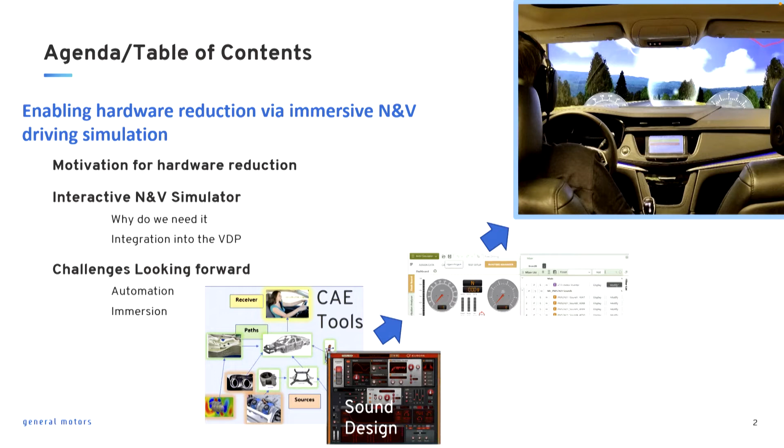So to start out on this motivation slide, it's a pretty simple slide, pretty simple schematic, that talks through what is probably a typical historical vehicle development process, I would say realistically at probably every OEM. And just to walk through the slide, the blue bar is all pre-production vehicle development, and the output of that feeds into this little green bar here, which would be the production development, so hard tooling, production assembly.

But if we focus on the pre-production vehicle development process, it typically has some form of pre-production vehicle development or component development, right? A lot of times those components are built using soft tooling. A lot of times they're built using some labor-intensive component assembly. Those eventually go into a limited run assembly process. Again, typically not a production environment, so it's kind of a station build type of offline environment. Sometimes it is really reworking in garages.

Those vehicles that are built using that process, obviously it takes a fair amount of time, but they go into physical testing. So a lot of times at a proving grounds, but the vehicles themselves are built from low fidelity parts, right? Again, they're soft tooling, so the tooling itself is not tuned. A lot of times things like acoustic packages aren't sealed entirely correctly. Mounts aren't fully developed, so the mounts themselves aren't isolating as they should be.

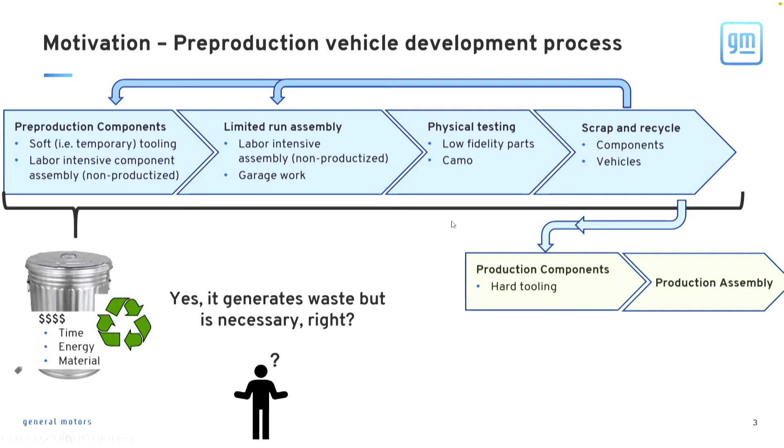So as an example, just to splash something up, hopefully most of you are familiar with the Hummer EV, but it's been stated that the development of this vehicle, all the way from concept to production, was in the neighborhood of 2 to 2.5 years, right? Which is about half of what a typical vehicle development process is. And a big part of what enabled that is this NV driving simulation.

So just to highlight how it came into the development process, if we think about the left side of the plot, early in concept development, this is a point where there's typically a lot of benchmarking done. We go and find competitive vehicles or vehicles that we build ourselves that are representative and set targets that way. In this case, there's nothing like it in the world, right? There's no competitive vehicle, there's no in-house vehicle that really represented what the Hummer EV would be. So it was necessary to do all the target setting in an NV driving simulator.

So we used that tool, brought in different road and wind noises based on what we'd expect from the tire design, from the suspension and the body structure, and also brought in different drive unit tonal levels. As we were going through the development, there's an expectation of what orders would be coming out of the drive unit. We set some different levels from that and built multiple models that let us virtually drive the car before it ever existed. Doing that let us bring all the program leadership into the room and agree on what the target should be for this vehicle at the driver's ear.

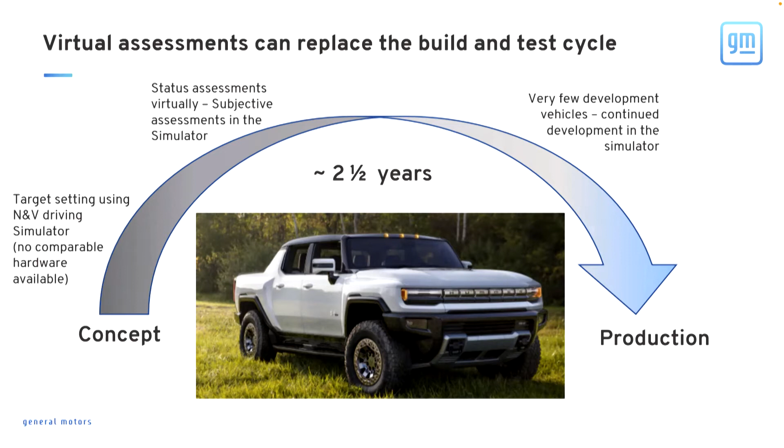So if we think about what I had just talked through, probably the natural question is to say, well, can't I just use our analytical assessments to targets? If we set targets on the left side of that last screen, if I just look at my drive unit tones and they're below target, then I'm fine, right? And I would challenge that and say that it's not really the case. The requirements are typically pulled together in a way that they're necessary. You need to meet the targets, but they don't cover every driving condition. And most of the time, you get target overload if you set too many requirements to try to fully constrain the vehicle development.

An additional challenge is when you have a target exceedance. Typically through the development, there is some form of a target exceedance. There's always a question, is it really a problem? If you're a dB or two over the target for your tones, is that really a problem? If it is, how much is it worth to fix that problem? So that's where actually listening to these sounds is absolutely necessary.

So in the little screen on the right, if we look at the two plots, real data, but presented generically, if we look at the red line, at the higher frequencies, it's higher than the green line.

First question is, how bad is the red line? So people who are really experts in this area, they may be able to look at that and get a feel for and really an idea of what that might sound like. But most people don't. They just see that, okay, there's a bunch of peaks and it may or may not be a problem. So they have to hear it to know how bad is it.

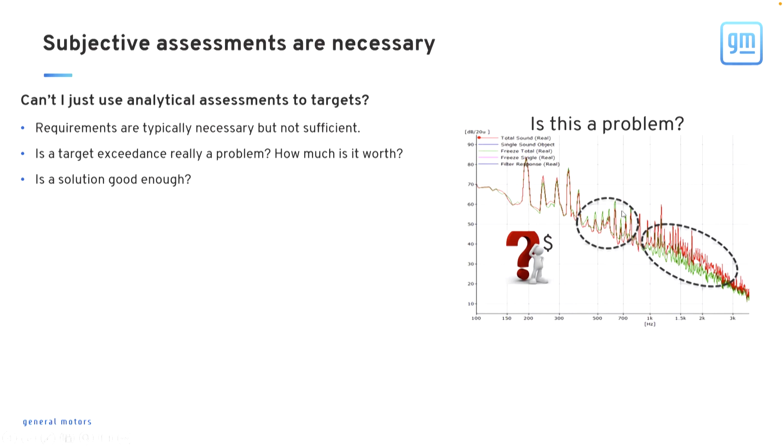You might set tonal targets that would allow motor tones to peak a little bit over the road and wind, but not significantly enough that you would really hear the difference or hear it as a problem. And that would be considered okay with the original targets that were set.

But then in this example, and pretty typically, the road and wind team goes and overachieves, right? They did better than they said they would. And you'd think, well, that's great, right? We just made the vehicle better. That's not a bad thing.

Except the people developing the drive unit, they're hiding behind that masking noise. So now their tones stand up way above the masking level. So now that becomes a problem. Even though they met their targets, it might be an issue at the driver's seat.

So things like this, the interactions between the different focus areas, is really something you can bring together in a driving simulator and allow you to listen to it and start to understand how do these interactions affect each other? How is a problem really a problem? How much is it worth to fix them?

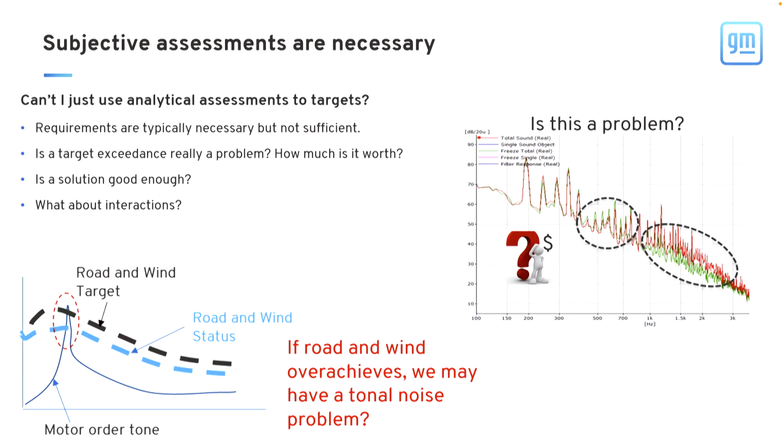So these subjective assessments are really the biggest value that's done during the pre-production vehicle development process. And the NVH simulator can help you get to some of those assessments. So that's where the interactive NVH simulator comes in, right?

I think most of you have seen a bunch of presentations so far that talk about how the simulator lets you bring in the vehicle performance data, so how quickly the vehicle accelerates, and it lets you recreate these major touch points for both sound and vibration, right? Sound at the driver's ear, vibration at your seat, vibration on the floor, vibration in the steering wheel. This data can be based on both measured or predicted responses.

But once you have that into the simulator, where you can either free drive it or set it to drive through some prescribed driving conditions, it lets you do target setting early on. It lets you do some of these contenting discussions and decisions, right? If you add a little bit better acoustic package, how much does it really help you? Is that difference worth the cost that comes with it?

But it also helps capture some of these interactions, right? If you hear a sound but you don't feel it, or if you feel a vibration but don't hear it, how do those things interact? So this multimodal interaction that comes with the NVH simulator is hugely important.

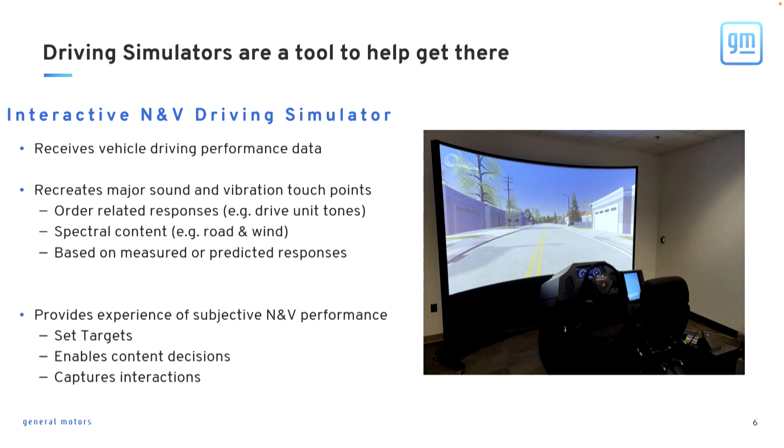So now we'll talk a little bit about how do we bring this into the VDP, and this naturally leads into some of the challenges associated with it. So one of the highlights I want to point at is that it's very necessary in an actual production environment, or in a typical OEM that has a whole bunch of programs and different brands that we're developing, that we streamline the process flow.

But an important thing to highlight is that if we look at this process and it becomes a manual process, right? If you're jumping from one tool to the next as you go through, if you're copy and pasting data, if you're taking data files and manually placing them somewhere, it doesn't scale to real volumes that we have in the automotive industry.

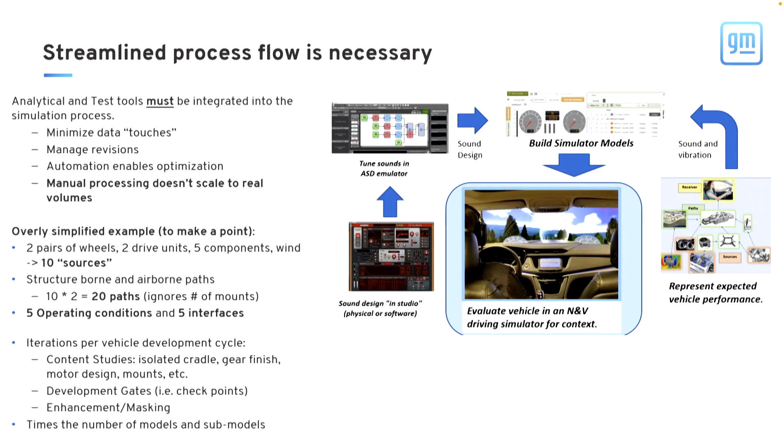So without some form of an automated development process, without integrating all of the tools together where data can go from one tool to the next, without somebody manually copying it, without somebody manually pasting it into another place, it doesn't scale to true volumes, to real production volumes, if you're doing this in a manual sense.

And just to really highlight it here is the statement about touches, right? Data touches. Anytime you have to touch the data in a virtual sense, it's very inefficient, right? It takes time. Somebody has to take time out of their day and go and copy and paste that data somewhere. And it leads to mistakes. If it's a manual process, invariably somebody grabs the wrong data and puts it in the wrong spot. So then the model that you built that you thought was correct is now representing something entirely different. So this whole cut and paste model building process doesn't scale to a true VDP.

So one of the biggest challenges that we have looking forward, one of the biggest challenges that we're trying to solve in-house, and again, I would say one of the biggest challenges that we need help from everybody, right, is how do we build these N&V driving simulator models that help us for vehicle assessment, but do it in a way that's much more automated, right? Much more automated in a sense that somebody who's developing the drive unit, if they build their drive unit model, they don't have to send data via email or via SharePoint site to somebody else.

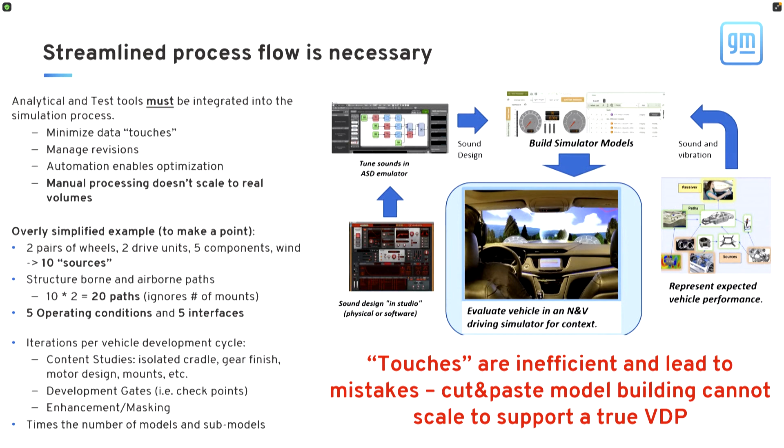Another big challenge as we look forward is realism, right? A simulation must feel right to decide to spend money to fix an issue. And to highlight this statement, and this is something that we've experienced a few times as we've been using this in some different programs, there's different examples where if you hear something in a binaural sense, but not in a true immersive sense with directional audio, it doesn't quite sound right.

So a simple example that really highlights it is rear-biased road noise, right? There's times when the road noise coming from the front of the vehicle isn't balanced with the rear. If you drive that vehicle, in the case where the road noise in the back is too high, it feels like something's open in the back. It feels like a misbuilt vehicle. You can't capture that if you don't have directional audio, right? So we're unable to represent that in a straight binaural sense that doesn't track your head in some manner.

Another one is a mirror whistle, right? A mirror whistle is a very localized event. If you play that back in just a binaural event where it's coming from all the way around you, it sounds entirely different.

How significant the issue is, is perceived entirely differently. Another one is sound staging for sound enhancement, right? One of the things we do as we develop and create sound enhancement is define where the sound should be coming from, right? If you're bringing sound enhancement in, are you trying to bring some sound from the front that moves to the back as you accelerate? Do you want the sound to be completely surrounded or coming from the lower front part of the dash?

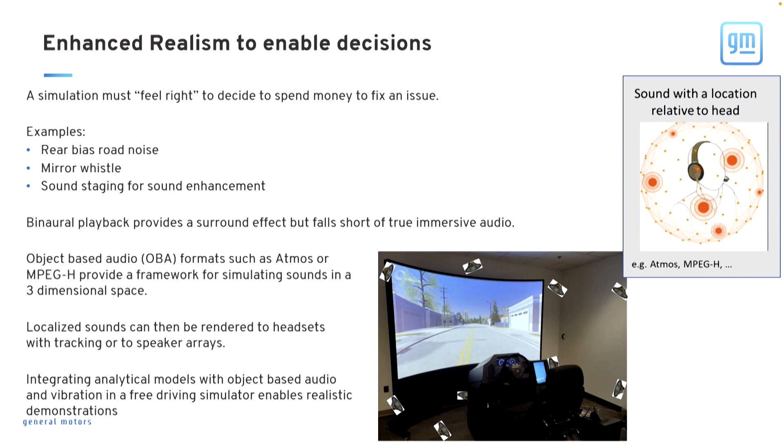If the chief engineer drives the model and it just doesn't feel entirely real, then they have a hard time really committing money to fixing the problem. So I'll leave you with the statement that integrating analytical models with object-based audio and vibration, along with the free driving capability within a simulator, enables this realistic demonstration, right? So somebody can drive it, and now it starts to really feel like they're in the vehicle, and it helps enable those decisions.

Okay, perfect, thank you. So just in time, the conclusion. I'll wrap it up by leaving you with this: free driving simulators provide a format that lets us virtually experience a vehicle before hardware exists, right? These are some of the programs that we started to run through our development process. It's absolutely necessary, looking forward, to integrate the CAE tools to allow an optimized and efficient data flow. And I truly believe that integrating true immersive audio with localization and vibration will help bring realism to the simulations that allow decision makers to make their decisions.